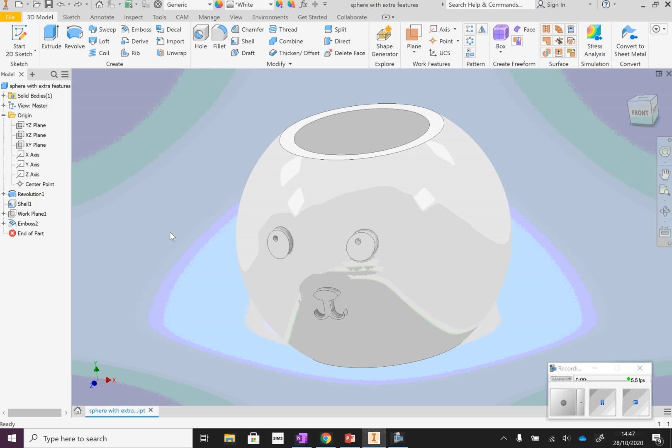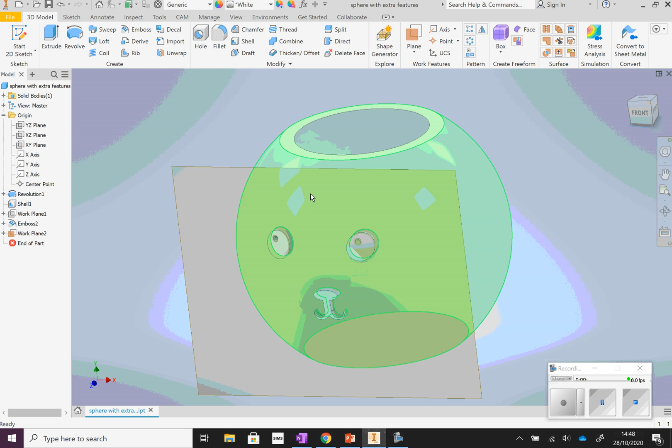So what we're going to do is have a go at putting a work plane in, similar to how we made the face features, but we're going to go towards the middle. So we want to pick work plane. We're going to pick the same work plane, so click on the front here. So the same work plane as where we drew the face, but we're going to offset it, which basically means we're going to move its position parallel.

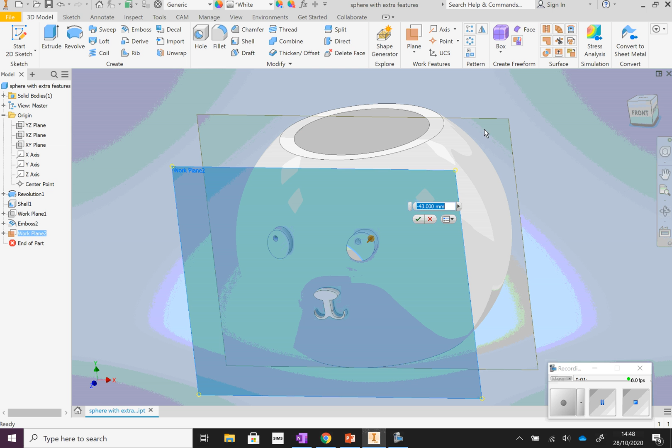So as you can see, it's getting lighter and lighter and lighter. So we're going to be drawing on this plane wherever it is we end up dragging it to. You can see the distance changing, and I kind of want my ears to start maybe about there, so I'll put it there. So that's my work plane there. And then we're going to start a sketch on that work plane. Fab.

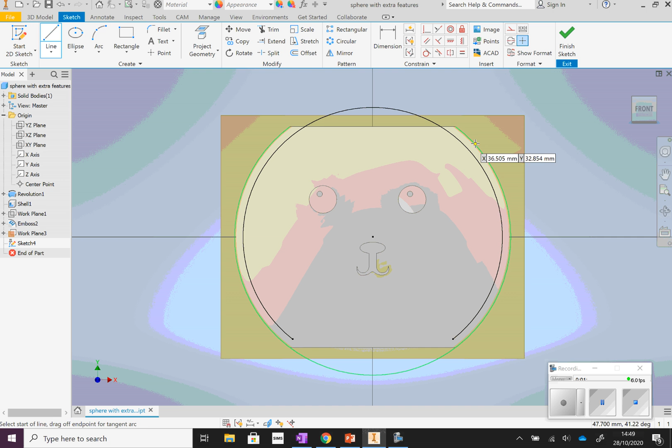So I'm going to draw some little ears. Now this is showing us the inside curve. We want it to join up to that ideally, so that it is actually joined onto the whole thing. So I'm going to quickly project the geometry of the inside circle, so we know that it's going to join up to it, and then start drawing with the line tool. So I'll make my ear start here, go up here, and then come down there. Click OK.

And then I will offset that geometry a little bit like that. Now that is going to make the inside of the cat ear. So if you have a look at the picture again, it'll be like the inside bit that's sticking in there. We're not going to do that right this second, we will do that later. So I've created the outside shape. Let me get rid of those for a second. There we go. So this is what we're going to make solid to begin with.

But we want to put the same thing on the opposite side over here too. So we've got two options. We can either draw it on using the dotted lines to match the parallels, if you watch very carefully. So you can see I'm on the green line in the middle and it's parallel. And then I simply go up so that it's parallel at the top, and then onto the green line and parallel to the one on the other side. So those ears should be about the same.

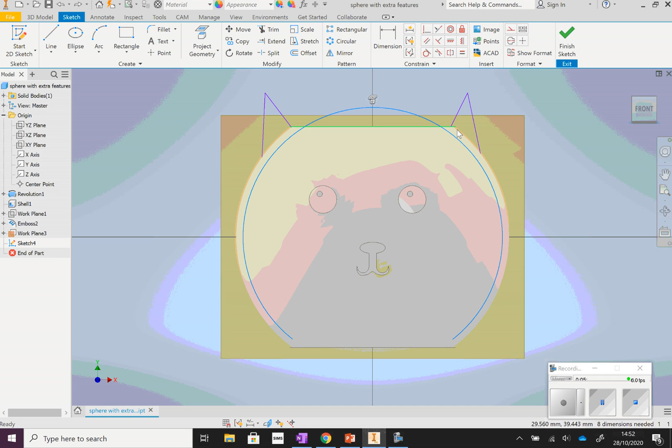Right, so I have this whole line around here and those there. Theoretically, these should make solid shapes. So if we finish sketch and click extrude, we've got those two there. And if I turn it round, you can see it is inside as well. So it is going to be actually joined up, which is fab.

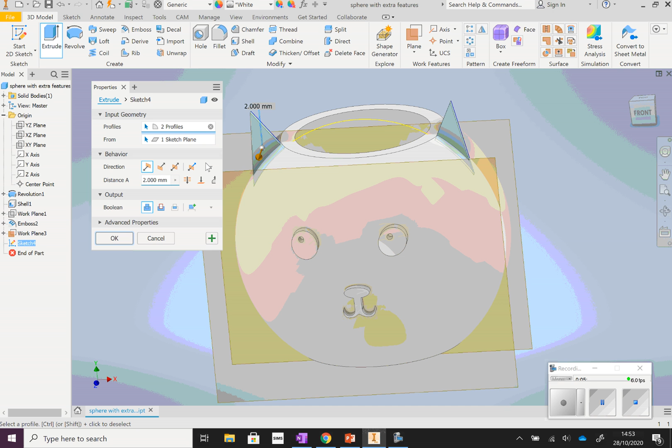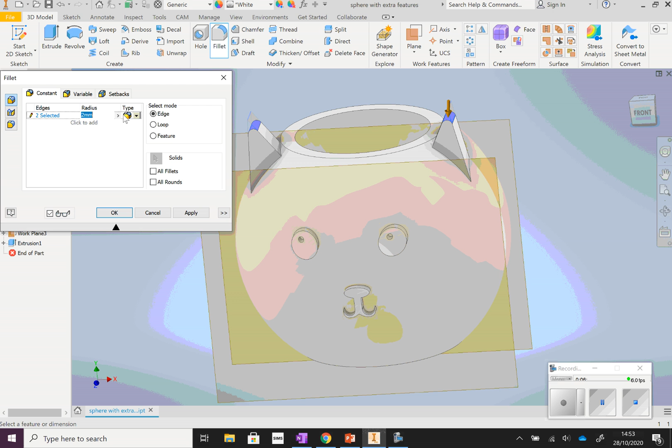I'm going to make them quite chunky ears. Let's have a look and see how that looks. There we go, 10 millimeters. It's about 1 centimeter thick. That's good. We'll go with that. I'm going to just fillet the top of his pointy ears so they're a little bit nicer to look at. That's better.

And then I'm going to draw the inside of the ear bits on those top bits. So start a sketch on the ear, and then we'll project the geometry like we did before.

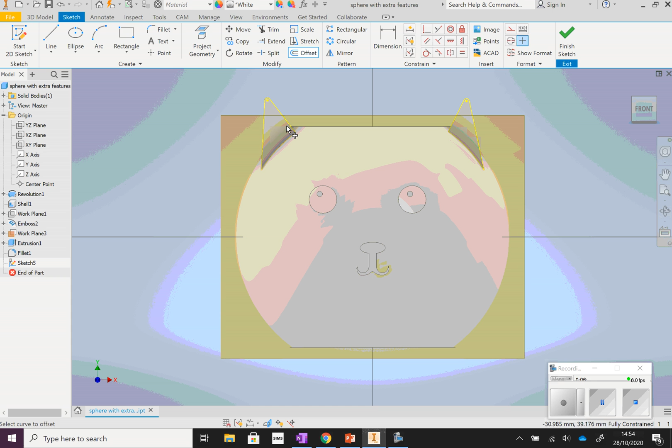And theoretically, that should let us offset the line. Let's have a go. There we go, that worked. If I go in by 2 millimeters, and the same on the other side, and then we'll extrude those, but we don't want them sticking out. We want them to cut material away. So let's go in by 3 millimeters.

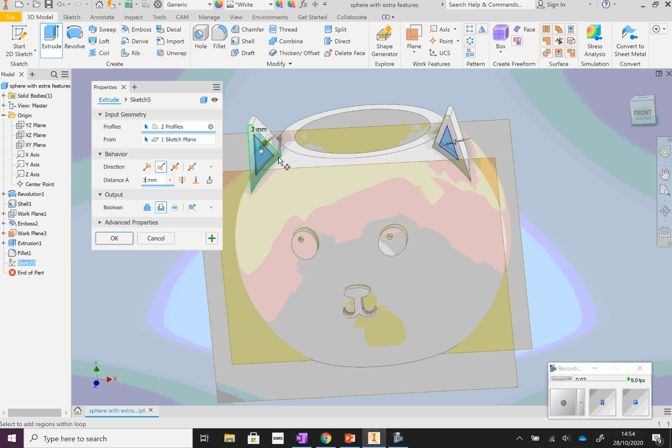There we are. So that is all joined up. He's got some funny little ears. I could fillet the back of them to make them rounded. Let's see if that will work. Oh, he looks a bit like a little piggy from this direction. Let's try.

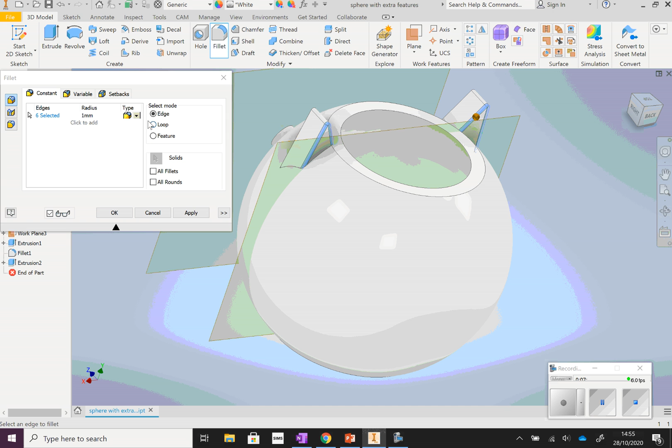So I've selected both of the backs, and you can change how big the fillet is. And if you just, without pressing OK, wait, it actually shows you the update of what it's going to look like. So that was 4 millimeters. It doesn't want to do 6 millimeters, it's not happy. So that's 2. That's 4. I think we'll stick with 4. So apply.

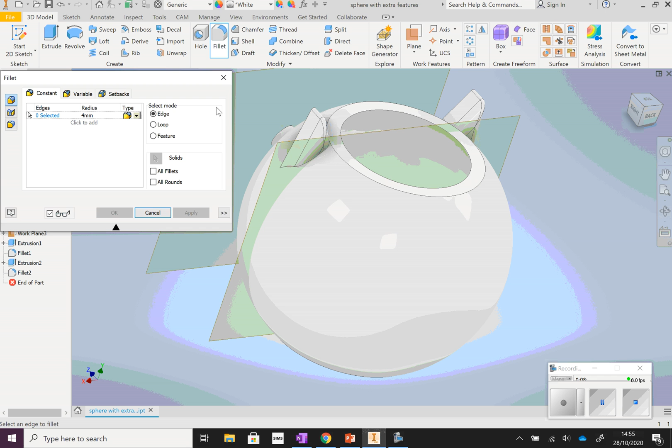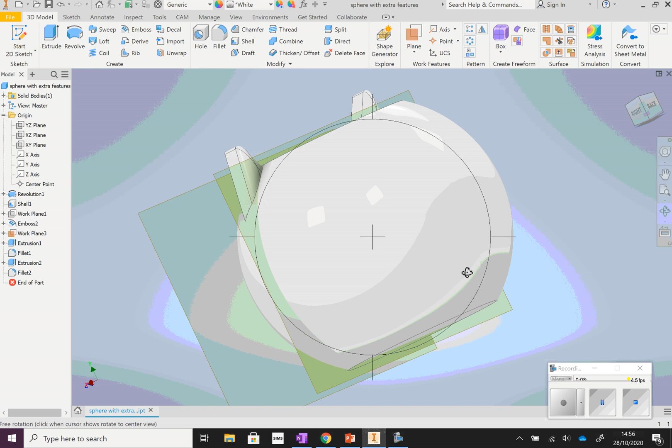There we go. So I've got some funky little cat ears. If you want feet on the bottom, you could draw a sketch on the bottom and make some little cat paws. So he's got some little cat paws. That could be quite cool. You could maybe even have a go at adding a little tail on the back. That could be quite fun to see. Not that you're all going to be doing kitties, but there we go. So that is my cat with additional features.

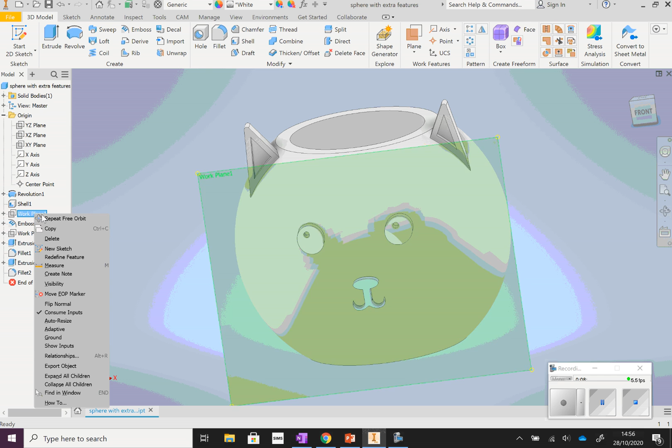And remember to do your screenshot if you want to hide these. So go on the work planes and click visibility, and it just hides them. Or view, object visibility, and all work features hides them too.

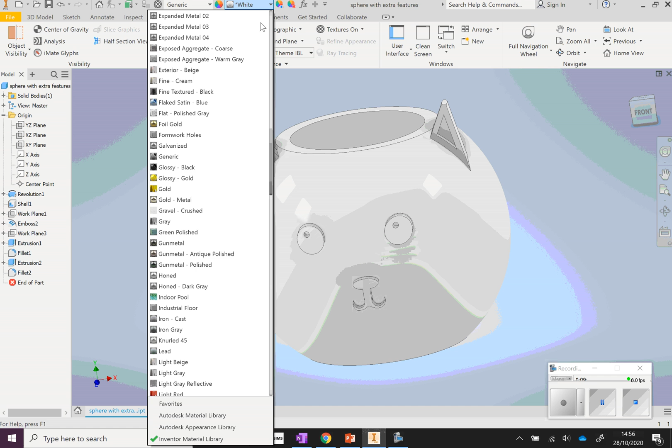So I've got white kitty. What colour could I make my kitty? Give him a black one. Black kitty. Oh, that's a bit crinkly looking. That's a bit weird. Maybe not that one.

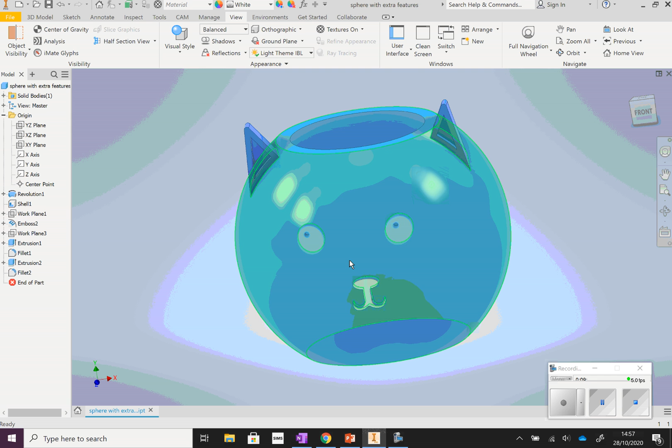Or we could have a yellow or a blue kitty. That could be quite funky. You can actually change the colour of these parts separately. So if I click on these bits separately, let's see if those will change. So at the moment they're white. So I could give him smooth black, little nose and eyeballs.

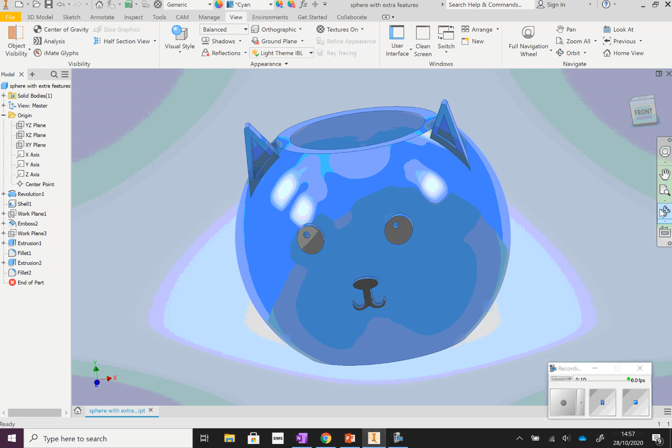Okie dokie. So once you've got that sorted out and you've played with the renders, have a go at saving a screenshot of that into your area on OneNote. So it should be going into here. So pop with an extra feature, little screenshot in there and shrink it down, please.

And the next one we're going to go on to is the hanging pot. So I'm just going to pause while I save that.

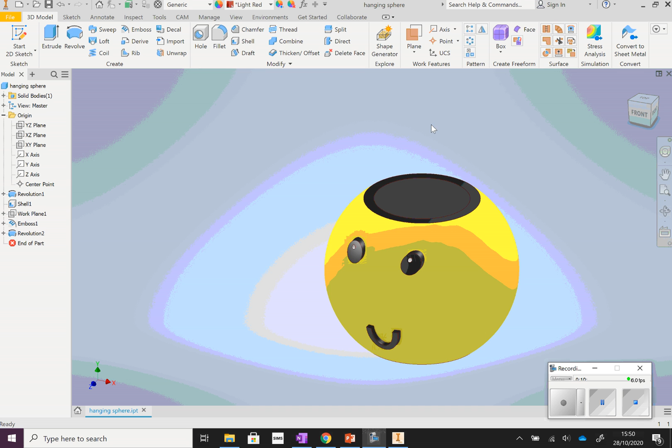It would mean that you don't have to have this flat bit at the bottom, but I would suggest keeping that in case you decide not to hang them up. I think a little hanging up pumpkin could be really quite cool. Don't know if anyone fancies trying that for me. But I'm going to do the wings like this on my little bumblebee dude.

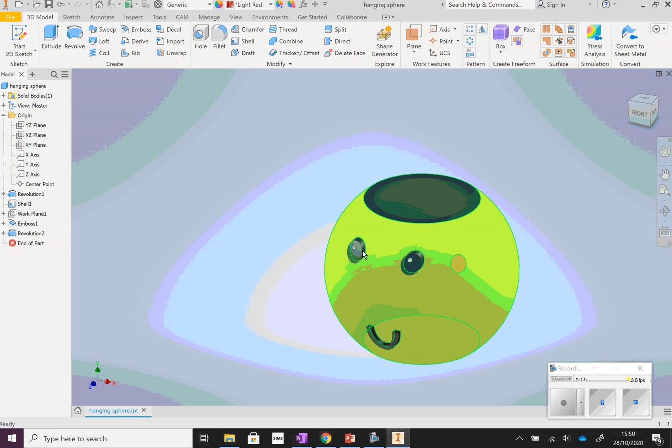So here's my little bumblebee. I stole my smiley face from earlier, but I've given him a little stinger. Okay, so I'm going to show you how to do extrusions that sort of come out of the side, turn into little wings and stuff like that. It doesn't have to be wings, you can make them whatever you want, I suppose.

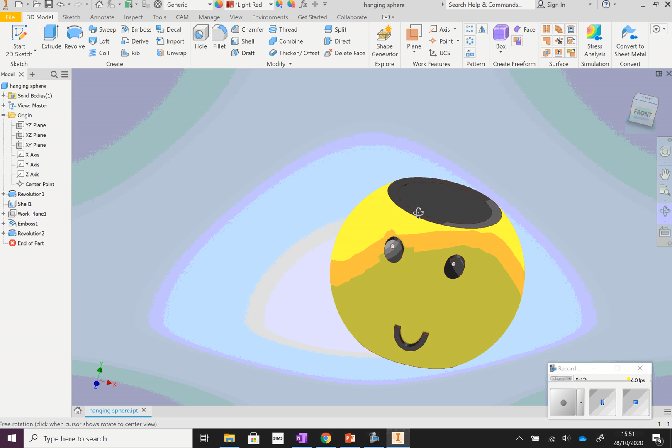So we're going to create a sketch on a work plane, but we want to have the work plane a bit higher up. So if I show you, you've got, move them a little bit more to make it easy to see.

So we've got this work plane here that goes through the middle. We want to draw a sketch just above there. So start a 2D sketch, and we're going to put it on that through work plane. And then we should be able to draw onto it.

Now I'm going to project the geometry of the inside circle, just so that we make sure it is actually going to be attached all the way through.

You don't want it to be weak and falling off and then having your pot smash onto the floor. No, don't get in trouble for making lots of mess. I'd get in trouble for making lots of mess.

Okay, so I'm going to use my spline tool to make my little wingies, I think. I'm going to have a go. That's one patch, let's make another one. I'll start it just above. There we go.

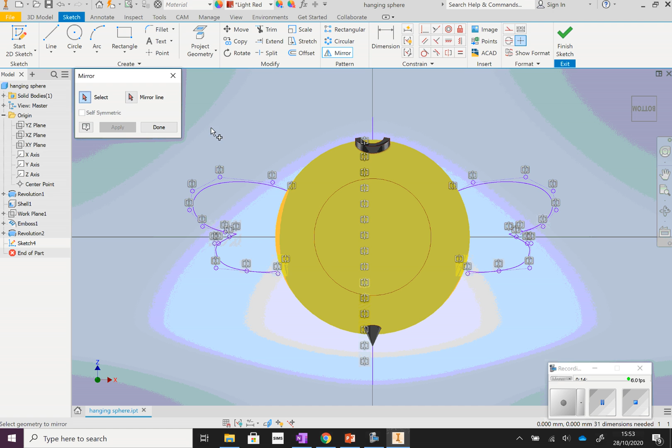So I'm going to select these two pieces and mirror. I've selected them already, so the mirror line is this bit here. If I click apply, it puts it in exactly the right place on the opposite side, look, so I don't have to worry about matching it up. So click done, and then hopefully, here we go, it will let me extrude them both.

I think they're a bit thick as they are. We don't want them too weak, otherwise they'll fall off, but we don't need them to be a whole centimetre. That's better, so 5mm thick will do.

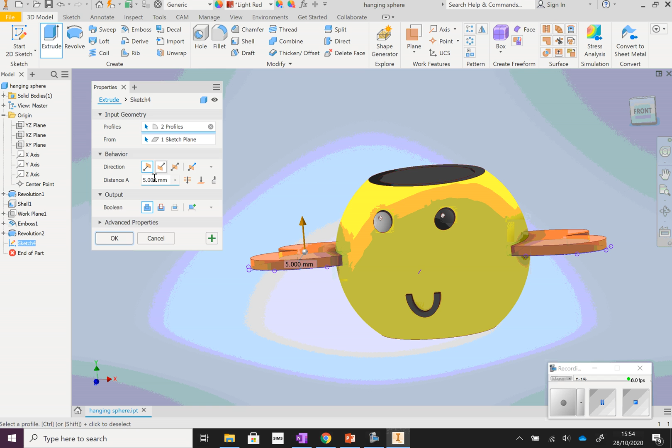And they've come up red. I'm going to change them so that they're white. So I select those bits and go down to white. Just turn it around so I can get to select the rest of it, look.

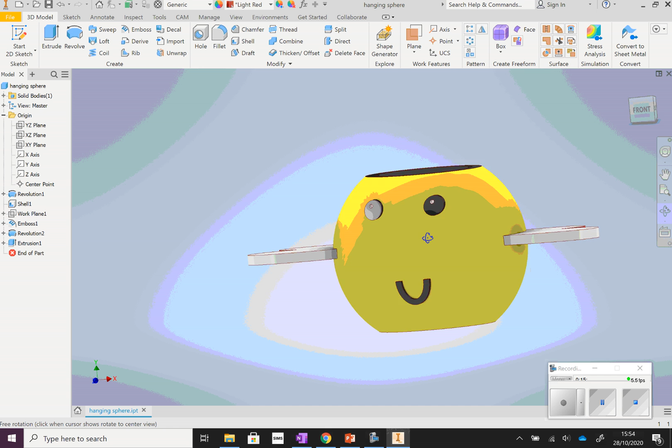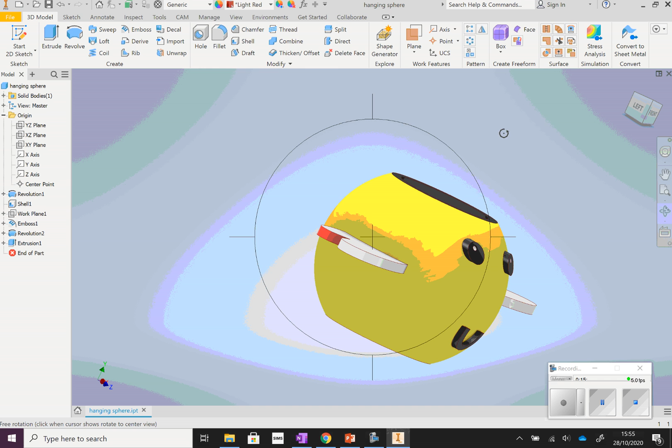Down to white. There we go. Wonder why it didn't select that one. Let's try again. That's better, there we go.

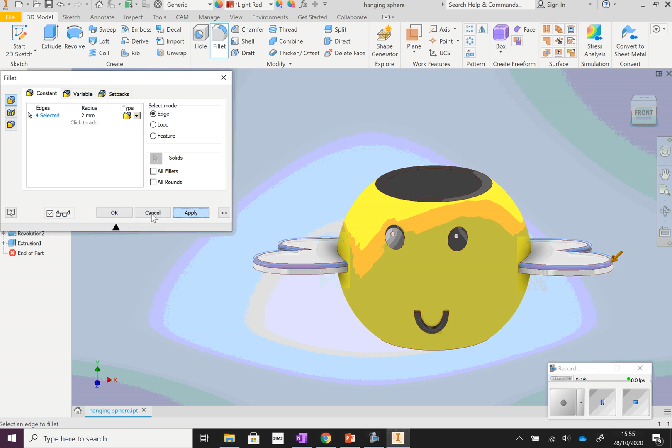So I've got some little bumblebee wings. You could, if you wanted to, and if it behaved, fillet them a little bit so they're nicer to look at. But I wouldn't do it by very much at all because you don't want to make them really weak. And then we'll change those to white because it looks weird like that. There we go, so there's my bumblebee wings.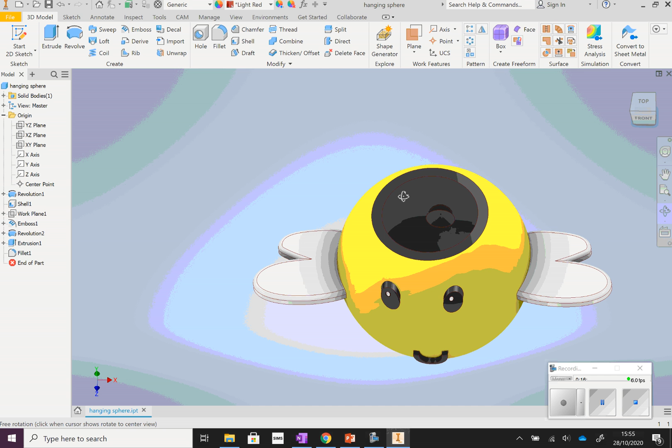We just need to make some holes in those bits for the string to go through. So we're going to start a sketch on top of the wings, make a little circle, and we'll do it 3mm, which should be just big enough to put some string through.

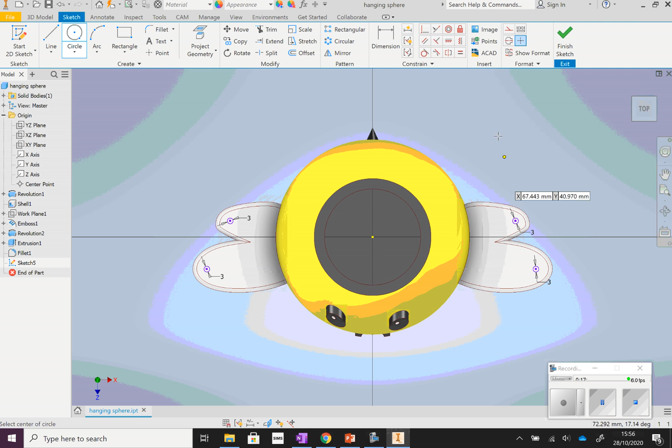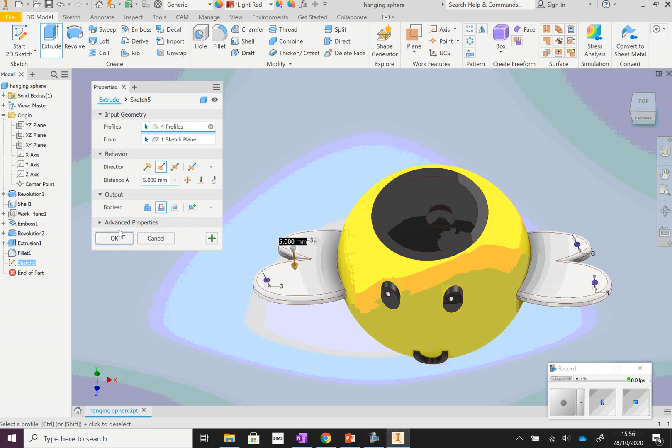So make sure you're checking your dotted line to make sure they're the same height as the ones on the opposite side, otherwise it'll end up wonky. So finish sketch, extrude. Now remember, we're trying to make holes rather than adding material, so we want to go on cut, and then 5mm because it's going to go all the way through. There we go, so he's got little holes through his wings.

And that is our little hanging pot ready to go. So make sure you take a screenshot showing me what you've designed for this, and it will go into the section that says hanging pot.

Now that is all 4 bits I'm showing you for this one. In the 2 spaces below, I'd quite like you to come up with your own choice using these skills. So these are here for inspiration. You can perhaps come up with something else that's Halloweeny or Christmassy, something we've not done yet. Maybe a little unicorn would be quite cool, or a little cartoon character whose face you could draw. Have a go at 2 interesting ones of your own to put down here, and then fill in the bit underneath for me.